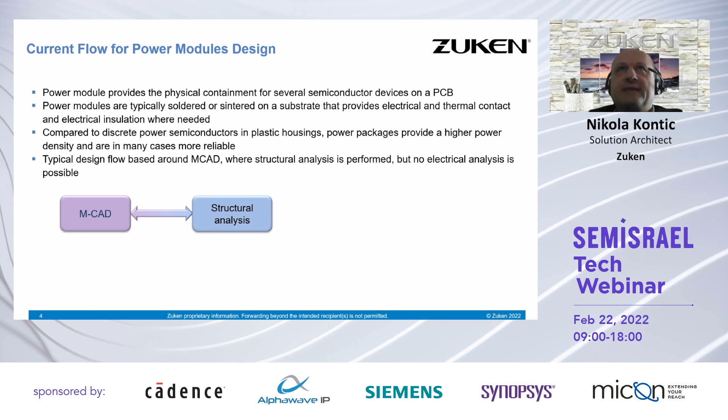But to give you an example, here we can see a particular device, and we can see some of the connectivity between the two different modules. We can also see connectivity within the component - for example, we've got multiple diode bond wires from a diode.

So the challenges faced here are the connectivity between different boards in a module, also the connectivity and component connections within a component, and also how this interacts with the actual package itself.

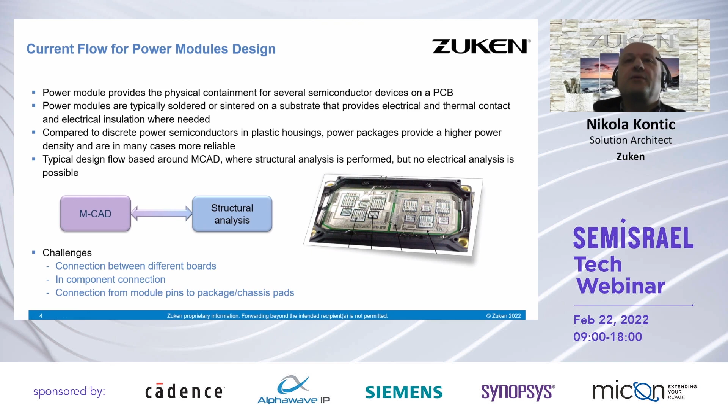What you can see in this image again is some mounting areas, but also some mechanically designed connectivity points. We have some terminal posts here on the left-hand side, and some signaling on the top here for defining that. As I said, traditionally that is designed by the mechanical environment, although it has electrical significance in the design.

With CR8000 design environment, the proposed flow is relatively new, where we can take the mechanical design information—the chassis, the housing, the ports or the copper clips—and combine that with the electrical information captured through circuit design using CR8000 Design Gateway. With both the mechanical and electrical information, we can pass that on to the physical implementation of the design flow.

The layout is done within CR8000 Design Force. Once we have that information and we've implemented the product, we can pass that on to structural analysis with mechanical design elements. But now we also have that electrical connectivity information, so we can send that out to electrical analysis, which is increasingly required for performing electrical analysis.

The complex power modules we're designing need to perform various electromagnetic analysis.

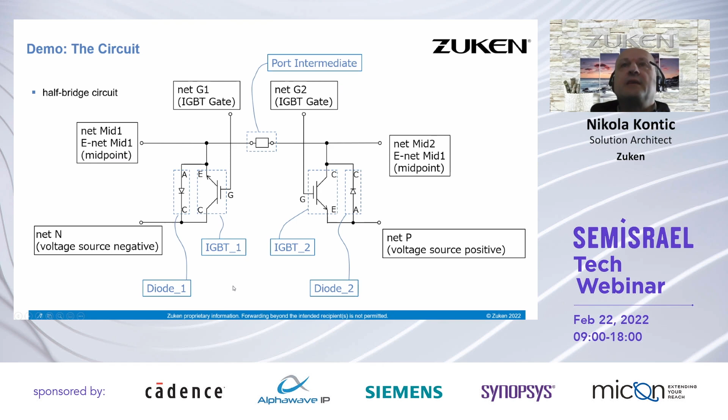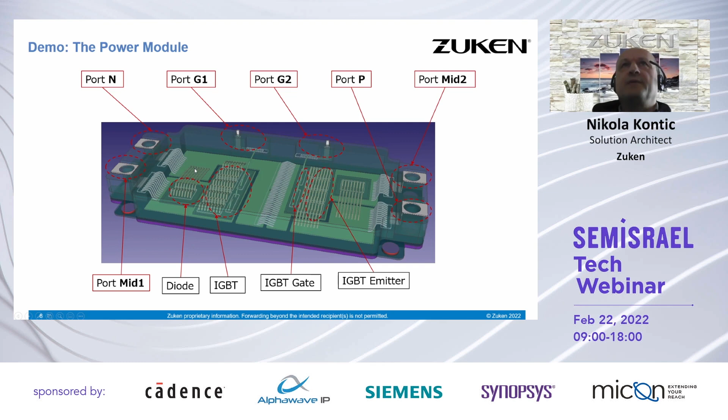Moving on, as I'm showing here in the demonstration, we have a package tab on the ribbon in Design Force where all the features for packaging are available. Firstly, we want to show how we can bring in some of the mechanical objects.

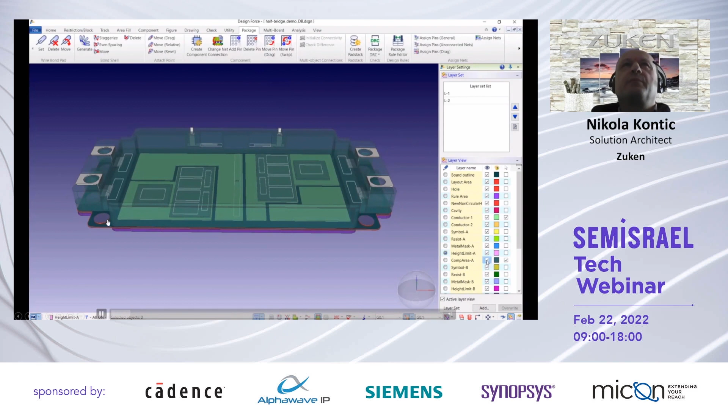So we're going to enable the visualization of accurate parts, which lets the mechanical information come through. We've got the chassis, which is semi-transparent. When we come to do design work, it's probable that we typically turn that off and we can start doing the design work. So you can see here we have the two modules, two IGBTs and the diodes.

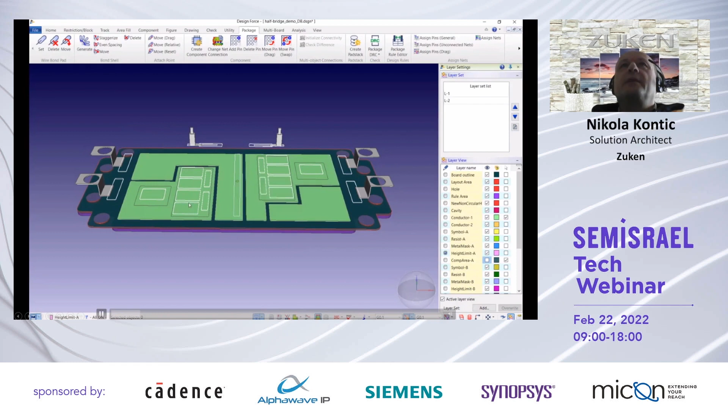And so the different wire bond connectivity, in component connectivity, and then finally to the gate 2 signals at the top.

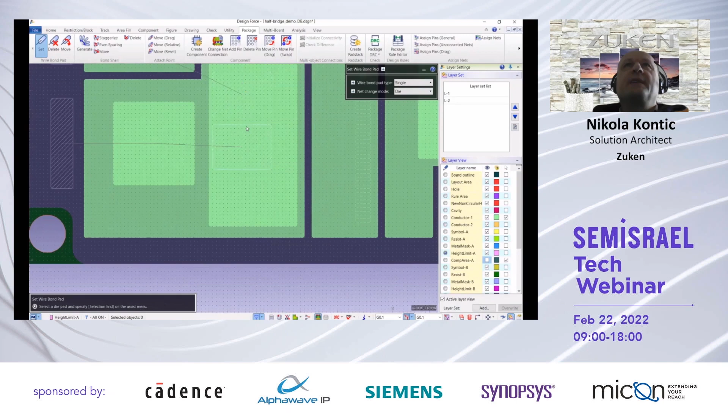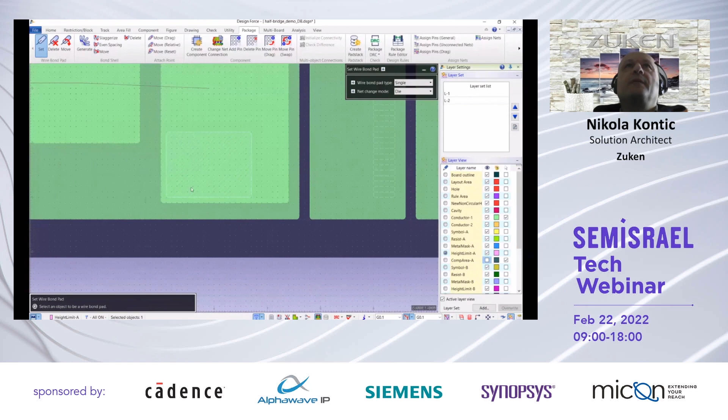In the functionality on the package, we're able to add wire bonds, delete wire bond pads, and move them. In this case, we'll add a single bond wire inside this particular IGBT. So we're picking on the pad and defining the starting point for the bond wire, and we'll define the end point of the wire. It's starting at this point, moving up along the pad, and then we can connect to the next pad within this component.

And we can continue that through the different pads in this particular component and finally conclude. Now if we toggle into the 3D view, we can see the profile of the bond wire, although it's a very thin line at the moment. We're just seeing how it's going to appear based on the profile.

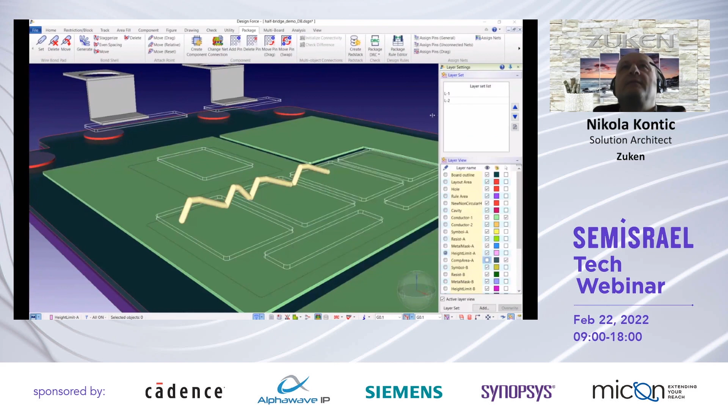Inside the package rule editor, we're characterizing how that will be visualized and manufactured. Here we can change the bond wire diameter to visualize the actual bond wire as it's going to be manufactured, having a true digital twin of what will be manufactured.

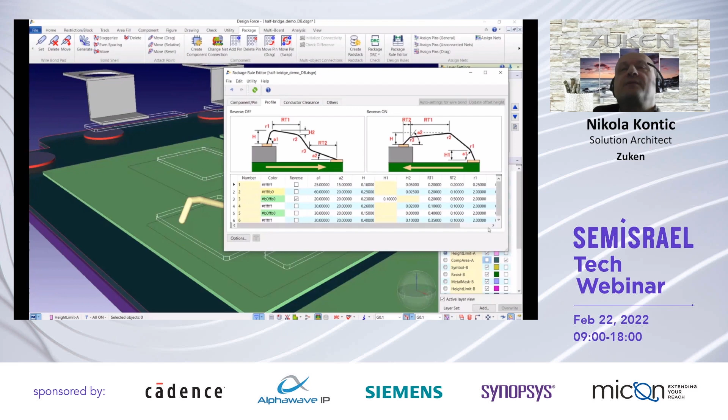Inside the package rule editor, you can also see the profile where we define how the bond wire geometry is defined, visualized and created. So we specify the height of the bond wire above the die pad, the angle at which it exits the die pad, and then onto a bond pad or another die pad, the angle again, and the distance.

So we can characterize fully each of the bond wires, the geometry of it, and then visually see that on the particular design. We can change it dynamically. So as you can see here, changing the 60 to a 50 degree angle, we can see the change in the bond wire.

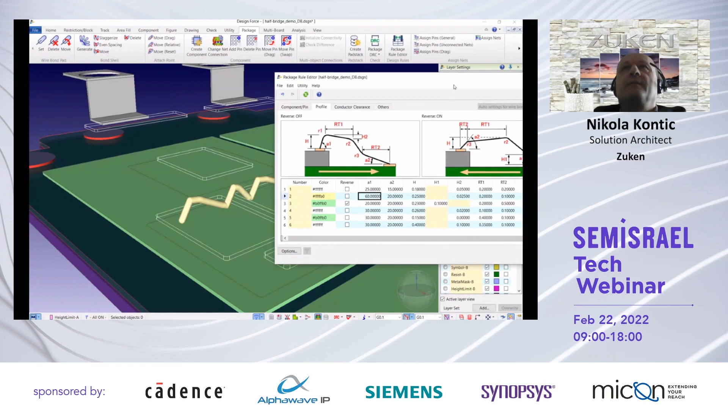This would have traditionally been done in mechanical to see, okay, maybe that bond wire isn't ideal. In this case, we can see the discontinuity in the bond wire. This may be something the manufacturer may have spotted and will rectify, but now we can do that to make sure the design is correct by construction.

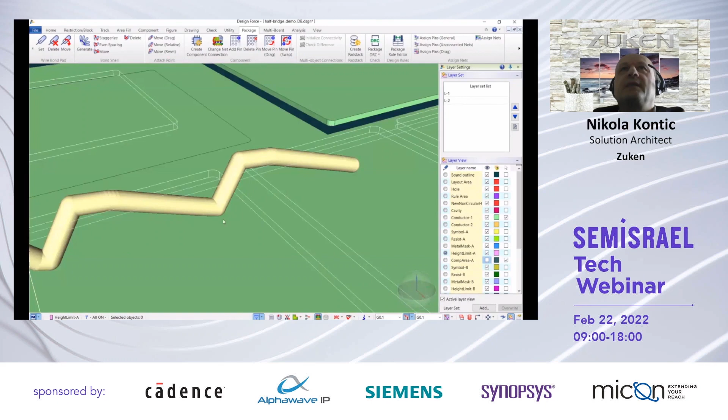So moving the attach point to make sure that it's coincident. And now if we toggle back into 3D, we can see that this is a continual bond wire, fully characterized as one bond wire.

Now taking an example of connecting, defining a bond wire from the component to a mechanical terminal, to a mechanical port. So if we add a particular bond wire from this gate 1 port, which was defined by the mechanical design environment, we can then connect that into the component, and we can then visualize also that bond wire.

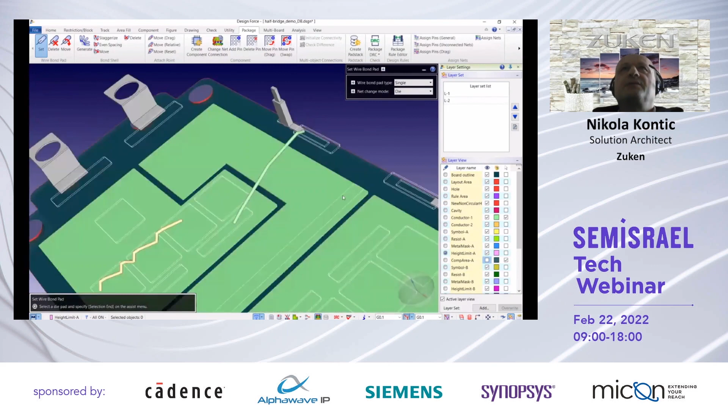Now we can see again, having the value of 3D visualization, we can see that maybe that attach point is not ideal. So at any point in the design process, we can move those attach points. Using the ribbon, there is a move function to drag the attach point to a more suitable location, so visually we can recognize that that's a good connection point.

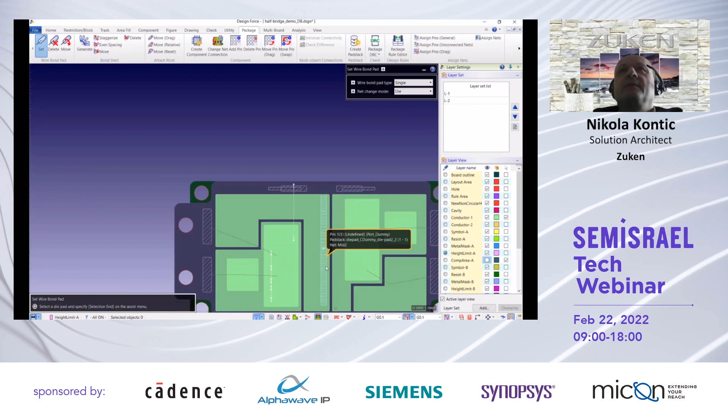Now, when it comes to connecting between the two power modules, we need to perform a bond wire, but this time it's going to be a ring connection. So we can specify the pad type being ring and then start the connectivity from one board to another.

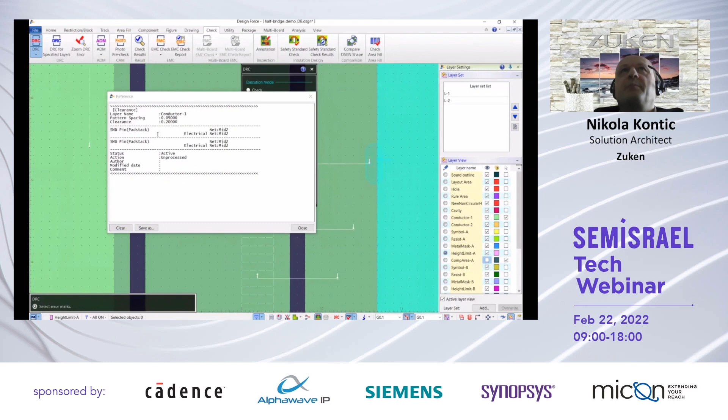Now, I'll show you some examples where we have the online design rule checking for the design, where maybe the attach point is too close to one of the other design elements. Online DRC will immediately flag up that our clearance is an issue. So if we check to highlight the issue, we can see that the spacing between the attach point of the bond wire is 0.09, and we need a clearance of 0.2. So immediately we can resolve that.

Again, this was only caught in the MCAD design review phases, but now we can do that inside of the design implementation stage.

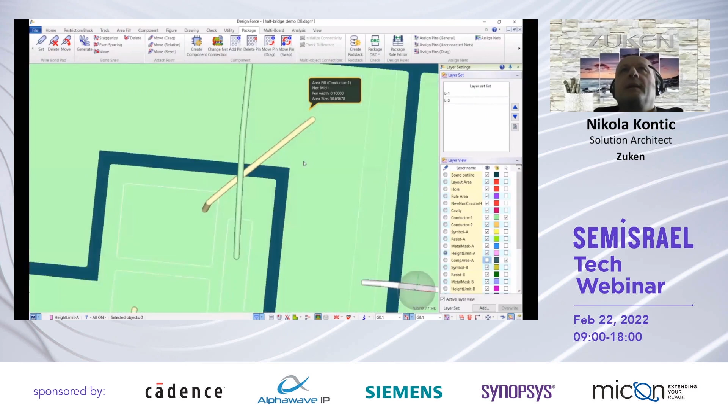We can also perform that with DRC check at a given time. As an example, if we add an additional bond wire, this time I'm going to change the 3D clearance space to have a bond wire coming very close in the 3D view. In a 2D view, we may not see the issue, but if we add a single or ring bond over onto the pad, and now view that in 3D space, we can see that the bond wires are coming very close to one another. So we can perform a DRC check at this point.

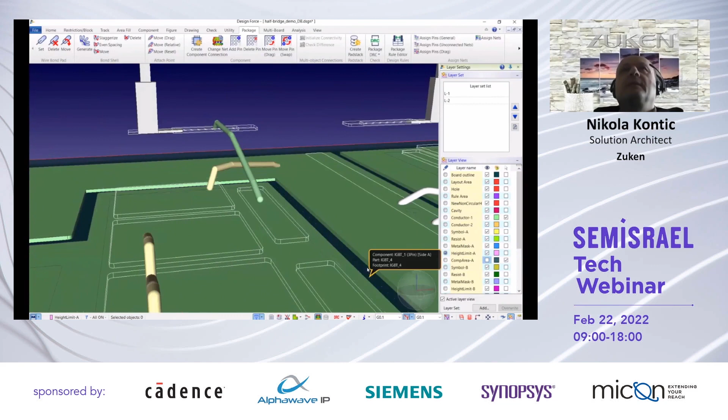Inside of the ribbon, we have our package design rule checks, and inside there is a multitude of different checks. We can see that there are several checks, and I'm specifically interested in the bond wire 3D check. So I can turn all the others off and focus on seeing that the 3D bond wire clearance needs to be 0.05, for example.

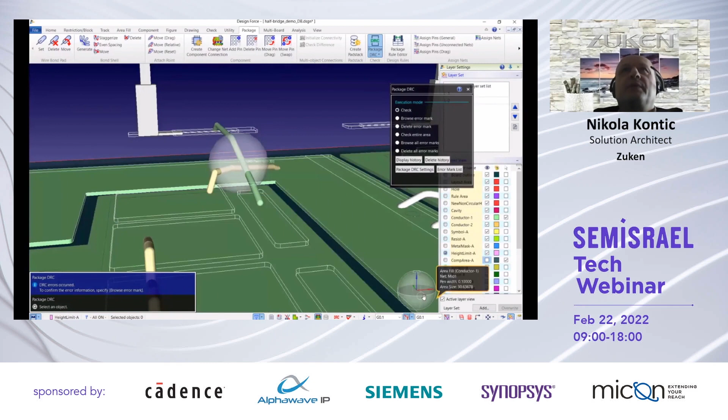And now if I perform the check either on the entire board, a selected area, or a selected point, we can see visually in the 3D view the error flagged up and reported, so we can take mitigating action to clear that, which is again moving the attach point of the bond wire to something that will avoid the check. And if we perform the check again, the clearance is sufficient, so we don't have a design rule check error.

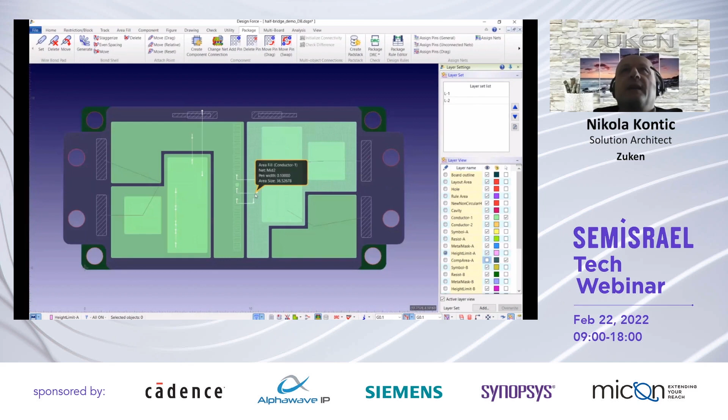So once we have completed this area, we have the information ready for the electrical analysis, and this information can then be passed out to the electrical analysis.

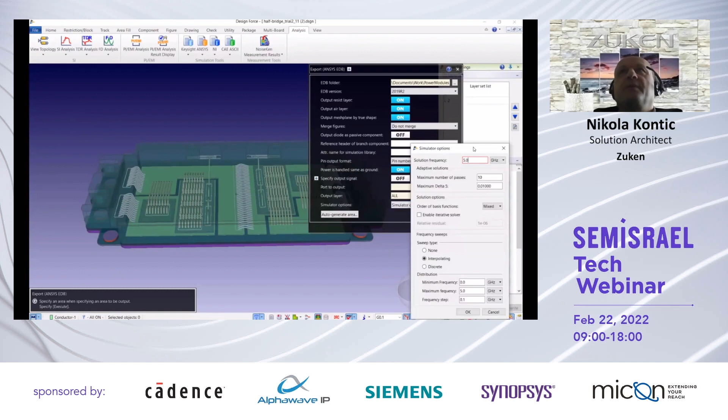On the analysis tab of the ribbon, we have different simulation tools, and we can export, in this case to ANSYS, the information. You can output specific signals, or you can decide to output the entire design and various parameters for the simulation.

Just moving back to how we share the information with mechanical CAD, we have the step output available, and that information will go forward into the mechanical for performing those checks.

So how have we verified or worked in developing this more efficient design process? Well, as our Zuken tagline says, the partner for success, we work with our partners and developed a more efficient design process for those partners involved.

In this case, the user case study we developed was to have the particular parts in the design, capturing the schematics, performing the implementation, and finally moving on to analysis.

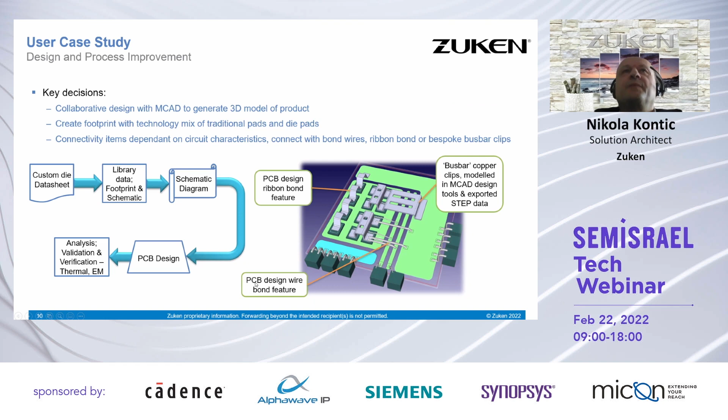But the important aspects here are the characterization of a ribbon bond and also using copper clips or bus bars, being able to visualize them inside of the physical implementation tool, the package design module tool, and also passing that information electrically to the analysis tool.

You can see here some examples where the mechanical design environment created the bus bar in a certain shape to avoid some of the ribbons that are passing underneath.

So of course, in the physical implementation in Design Force, we have those 3D clearance checks to make sure that the ribbon bond is sufficiently away from this mechanical bus bar that is connecting across.

We have imported the bus bar from the mechanical. It's come through as a step model, but we have the electrical information for the connectivity of that particular item. We have the 3D checks, and also we have the characterizations of those ribbon bonds.

Now, traditionally, years ago, we would have done that with three bond wires connecting the same point, but the technology is there to generate these different ribbon bonds.

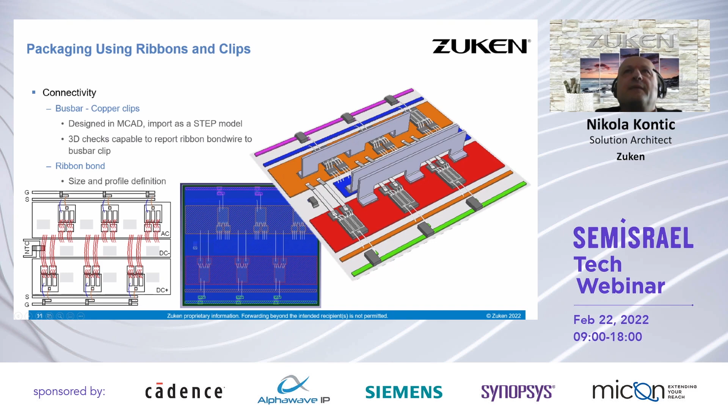And when I say ribbon bonds, we can characterize them in various ways for the design. We specify on a traditional bond wire the diameter, but on the ribbon bonds we have the width and the thickness to define. So we can see for diode one and two we have particular ribbon geometries, but on the third one we need a much thicker ribbon connecting it.

So we assign the different types and profiles as we did with the bond wires, but in this case for a ribbon, and we can see here how the information is characterized in the system, so for bond wires or for ribbon bonding. And then we have the profile of the ribbon, again the ribbon is a different profile geometry compared to a bond wire.

So in summary, I've shown you about reducing the design time and increasing the quality through the use of ribbon bonding in addition to the conventional bond wires. The complete and consistent data that we can now pass, both the mechanical information and the electrical information, to analysis.

Improving the efficiency in the design process, well the information is now both the mechanical information and the electrical information is in the design implementation tool. So we can perform some of the 3D checks early in the design process, and we can deliver a much more correct first time design. This enables us to have a quick, efficient, and productive design flow.